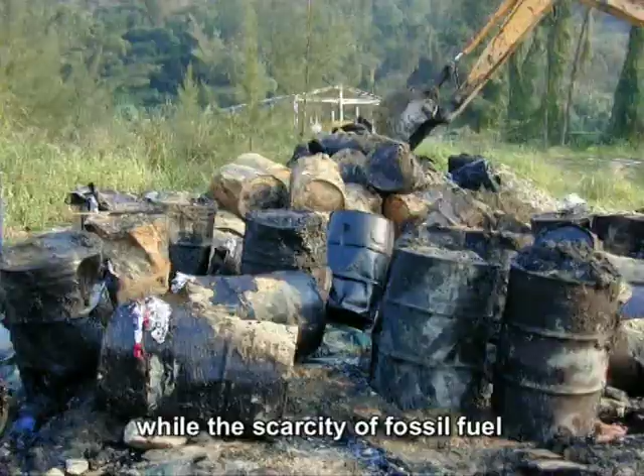In the 21st century, used lubricants are generated in every city where cars, machinery and manufacturing equipment are widely used, while the scarcity of fossil fuel is becoming alarming. In view of the perpetual increase of international crude oil prices, recycling used lubricants into green lubricants or reprocessed fuel oil in an environmentally friendly and cost-effective manner has become a sensible option.

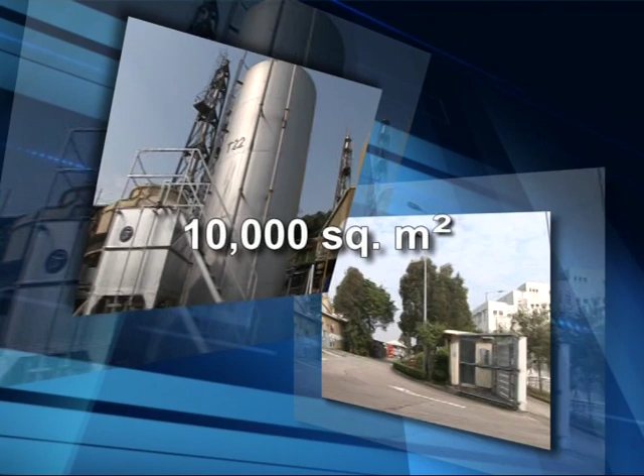In 1993, Dunwell acquired and restructured a 10,000 square meters used lubricant re-refinery in Hong Kong. With continuous effort in technological upgrades and implementing innovative business strategies, Dunwell manages to collect and treat more than 85% of used lubricants generated in Hong Kong. By improving the wiped film evaporation process, Dunwell is capable of recycling up to 400,000 gallons of used lubricants per month. And Dunwell has been recognized with many awards for its contribution to society and the environment.

Realizing technological limitations and high operating costs in distillation, Dunwell has been exploring and developing alternative technologies from the world since 1996. Today, Dunwell has successfully transformed a vibrating membrane mechanism and developed the world's first Vmat used lubricants recycling technology. A successful used lubricant recycling operation depends on three factors. Firstly, the ability to collect and segregate various types of lubricants. Secondly, efficient and cost-effective technologies available. And thirdly, the ability to market the recycled lubricant products.

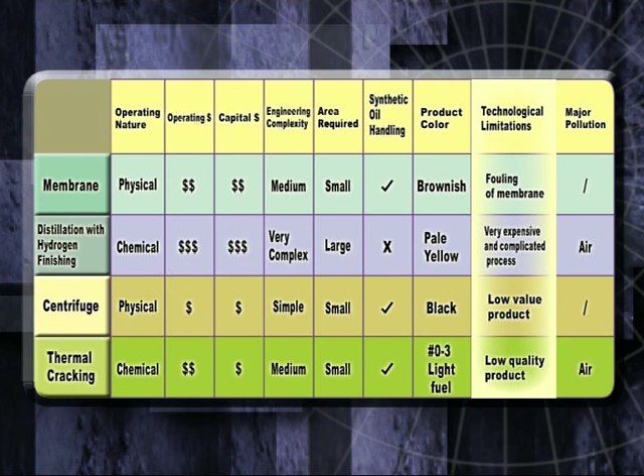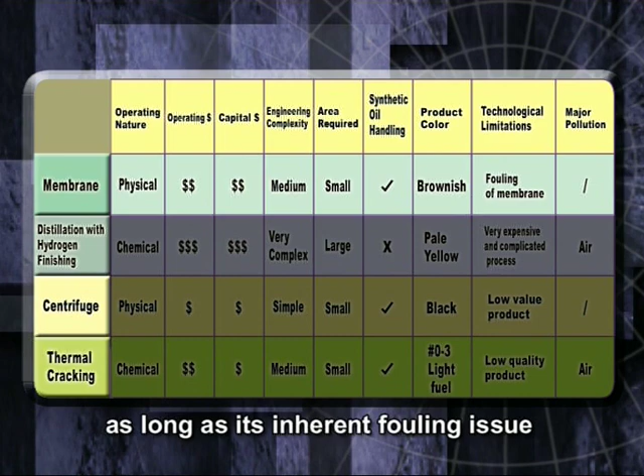In considering various recycling technologies available worldwide, such as membrane filtration, distillation with hydrogen finishing, centrifuge, thermal cracking, etc., one has to consider the operating costs, capital investment, engineering complexity, the area required, the ability to handle synthetic-based lubricants, product color, technological limitations, and secondary pollution. Amongst these options, membrane filtration is a relatively simple and cost-effective solution, as long as its inherent fouling issue can be resolved. As the contaminant within used lubricants is of relatively large amounts of particles and the lubricant is viscous in nature, conventional cross-flow membrane technology has the membrane fouling problem.

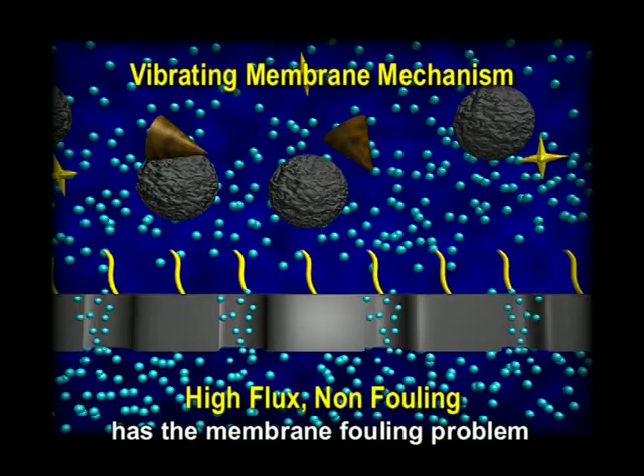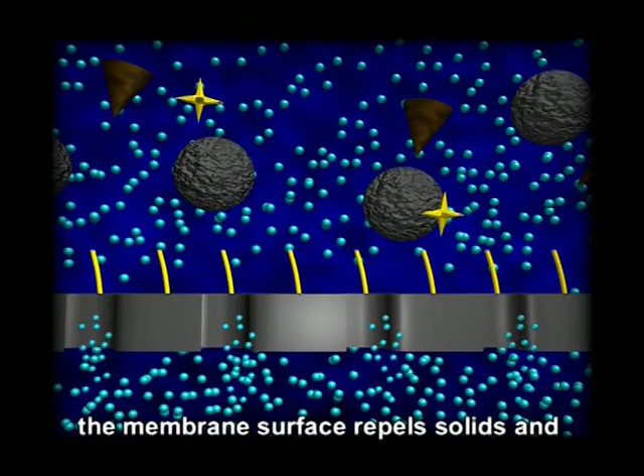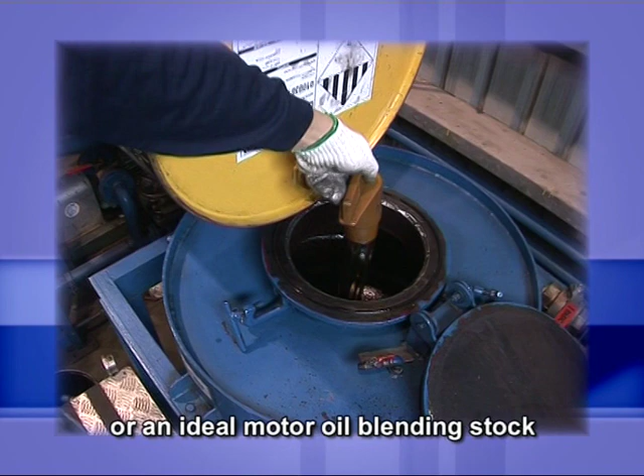By adopting Vmat's vibratory shear enhanced process, the intense shear waves generated along the membrane surface repel solids and foulants from the used lubricant and allow clear oil to flow through the membrane pores continuously in just a single pass. This light brown clear oil is a quality fuel oil or an ideal motor oil blending stock for engine lubricants when blended with suitable additive packages.

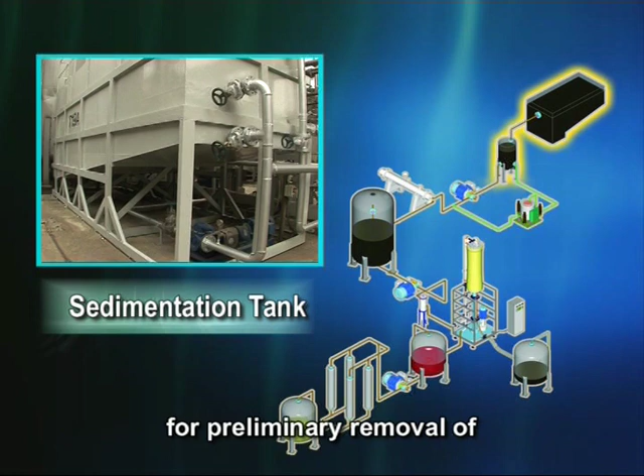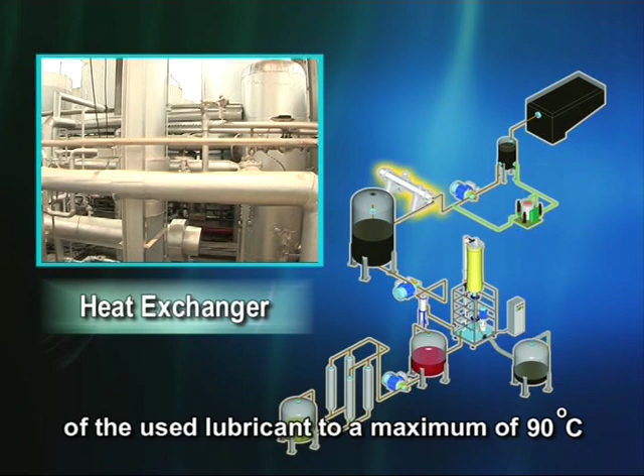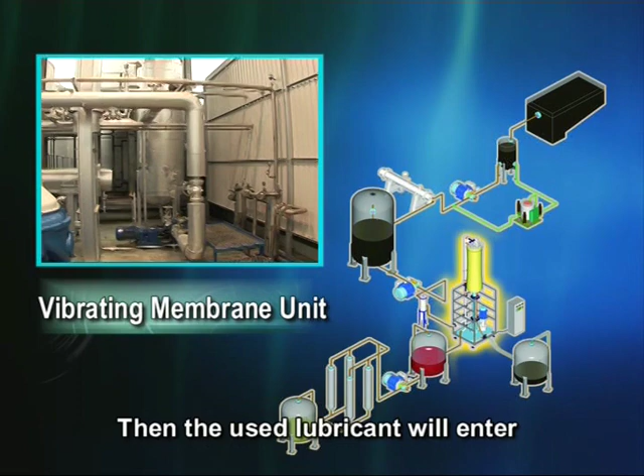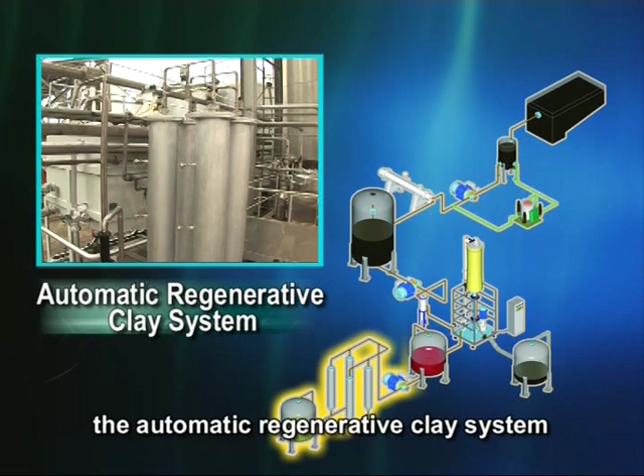Used lubricant is first stored in the sedimentation tank for preliminary removal of impurities, large solids and wastewater. The heat exchanger increases the temperature of the used lubricant to a maximum of 90 degrees centigrade. Next, a special centrifuge will further remove the viscous material and solid particles. Then the used lubricant will enter the vibrating membrane unit. With just a single pass through the membrane, the used lubricant is filtered into clear oil, which can be decolored through the automatic regenerative clay system to attain a good color of the base oil.

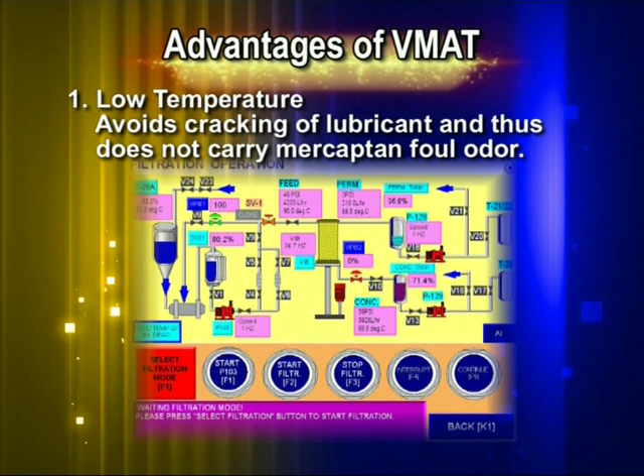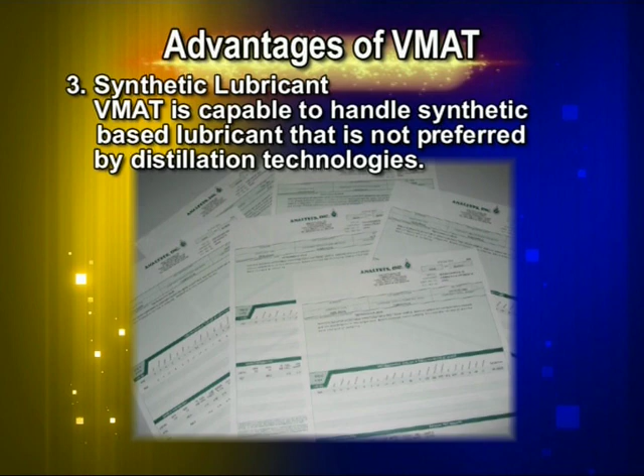Through the programmable logic control PLC system, VMAT can be accessed, controlled and monitored through the internet by this remote support system. Advantages of VMAT: 1. Low temperature. Avoids cracking of lubricant and thus does not carry mercaptan foul odor. 2. Low pressure. Minimizes consumption of electricity and prolongs the useful life of the membrane. 3. Synthetic lubricant. VMAT is capable of handling synthetic-based lubricant that is not preferred by distillation technologies. 4. Small footprint. Occupies only 50 square meters and allows retrofitting in existing premises. And 5. Low cost. Return on investment can be less than 2 years.

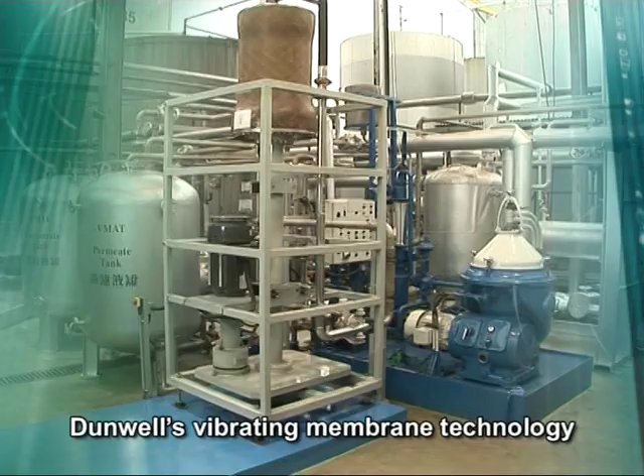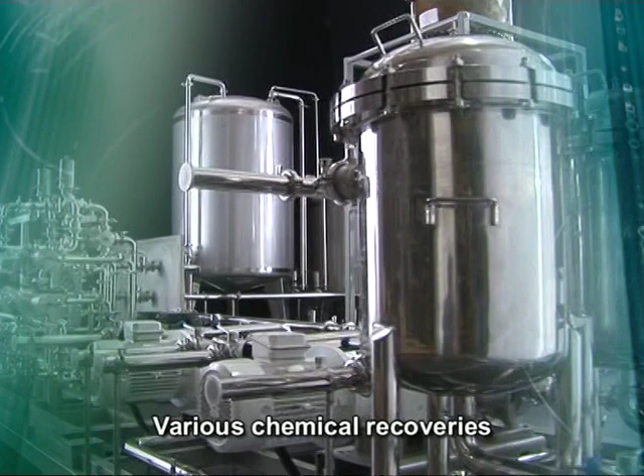Dunwell's green lubricant is now being supplied to the Hong Kong government, construction industries and utility companies, manufacturers and overseas clients. Behind the successful development of the VMAT system is a strong engineering team, equipped with solid experience in the used lubricant recycling area and powered by strong enthusiasm towards technology advancement. Dunwell's vibrating membrane technology can be applied not only on used lubricant recycling, but also in many applications, such as wastewater treatment, MBR for municipal and poultry wastewater treatment, various chemical recovery, cutting fluid recycling, treatment of landfill leachate, and the filtration of produced water from oil fields.

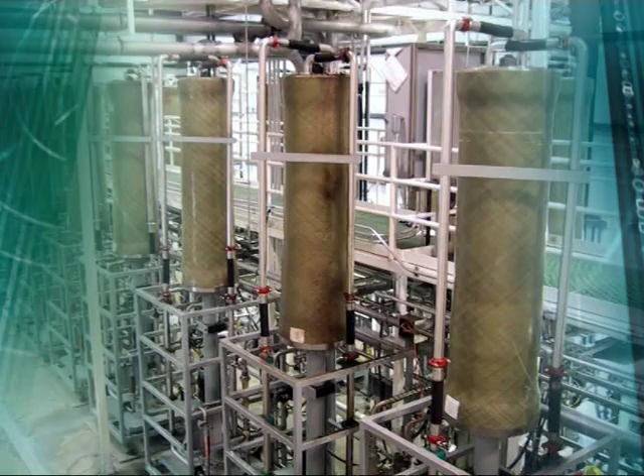With over 13 years' experience, Dunwell is geared to provide a commercially sensible and technologically effective solution to different clients. On February the 27th, 2006, Dunwell's Vmat system received the Grand Award from the Hong Kong Awards for Industry, Machinery and Equipment Design category. This is the most prestigious award in Hong Kong, recognizing outstanding industrial product design, and is presented by the Chief Executive of the Hong Kong Special Administrative Region Government. We sincerely look forward to developing our environmental enterprise with overseas partners. So let's join hands to create a better environment for our future.